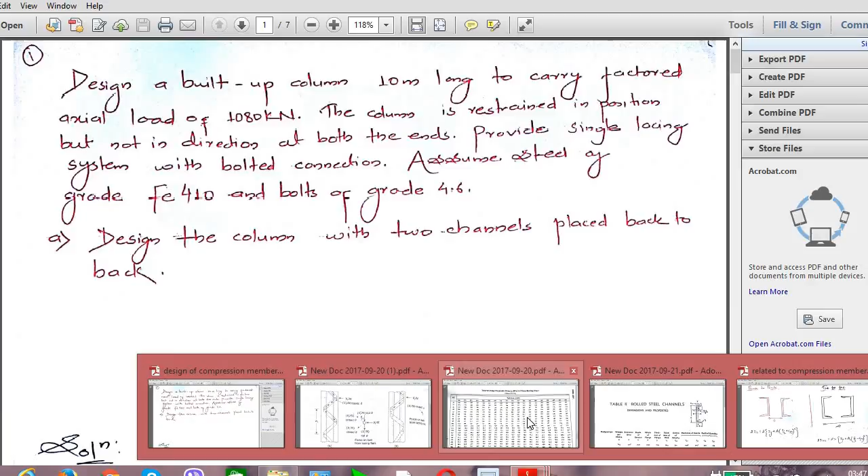So see, you will get some value for this. Okay, so your question was restrained in position but not in the direction. So according to conditions the value will vary. So the translation is completely restrained at both of the ends while rotation is free at both of the ends, right? Because not in the direction.

So our condition is the translation is restrained by position at both of the ends, and the rotation is free at both of the ends. So the value is 1 times length. So your effective length is 1 times L.

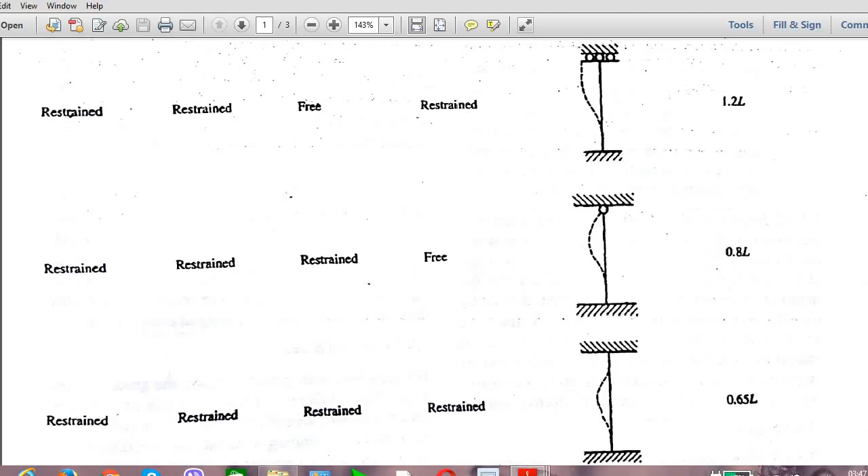So similarly you can go for different values according to different conditions. The conditions will be given to you in the question, so according to those different conditions you can take different values. You can get this from table 11 of your code book, IS 800 2007.

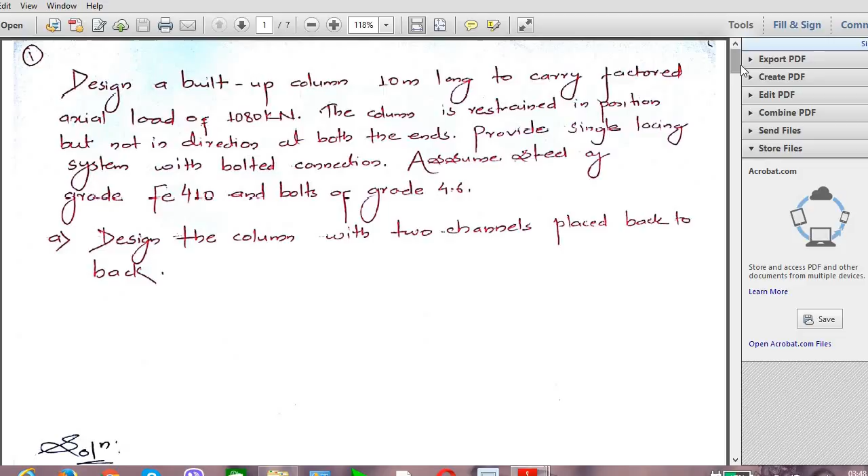So now provide a lacing system with the bolted connection. Assume steel of grade Fe410 and a bolt of grade 4.6. So the grade of steel is given as 410 and the grade of bolt is 4.6, and it is asked to design the column with the two channels placed back to back.

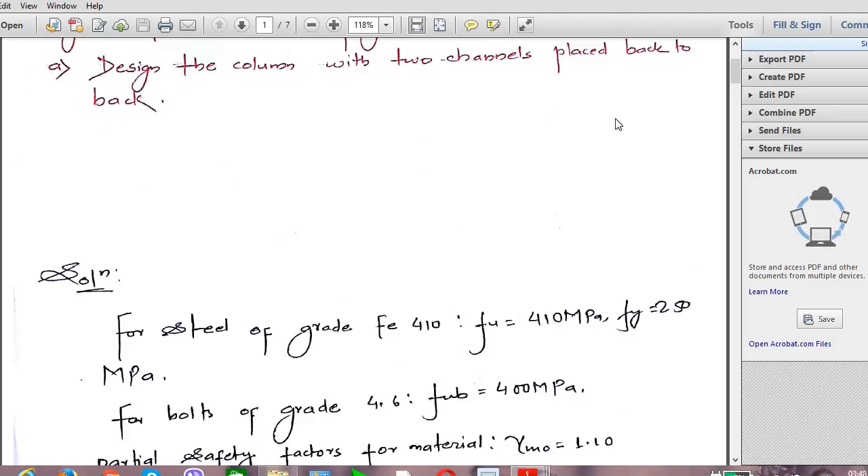So sometimes they might ask you toe to toe. Actually I am going to design the column with two channels placed back to back. In my next video I will explain toe to toe. Okay, so for a moment I'll show you what's the difference between back to back and toe to toe.

See, back to back means the flanges of the channel are facing opposite to each other, they are not facing each other. In toe to toe, the flanges of the channel are facing towards each other. So this is known as back to back and this is known as toe to toe.

So according to the conditions the formula varies here to find the value of S, it will vary. I'll explain that in the numerical.

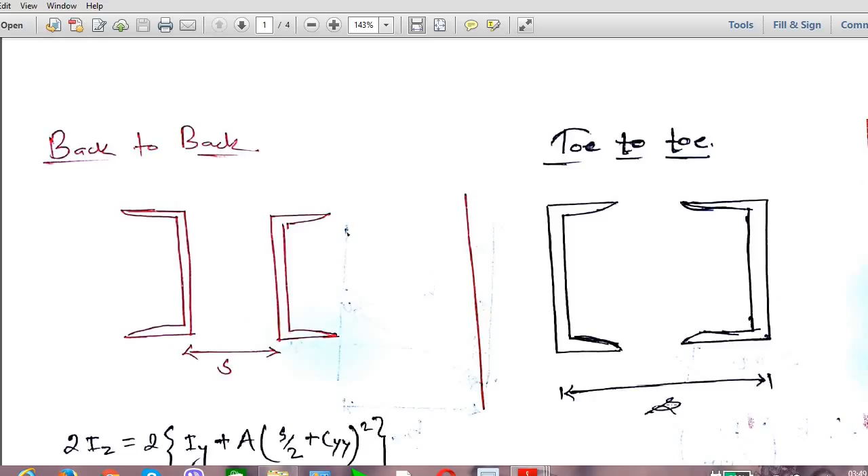So this is the difference: the distance between one edge of the channel to the other edge is S. Here also, the same condition, the distance between one edge of the channel to the other edge of the channel is also denoted by S only, that is spacing. You will be more clear in the numerical.

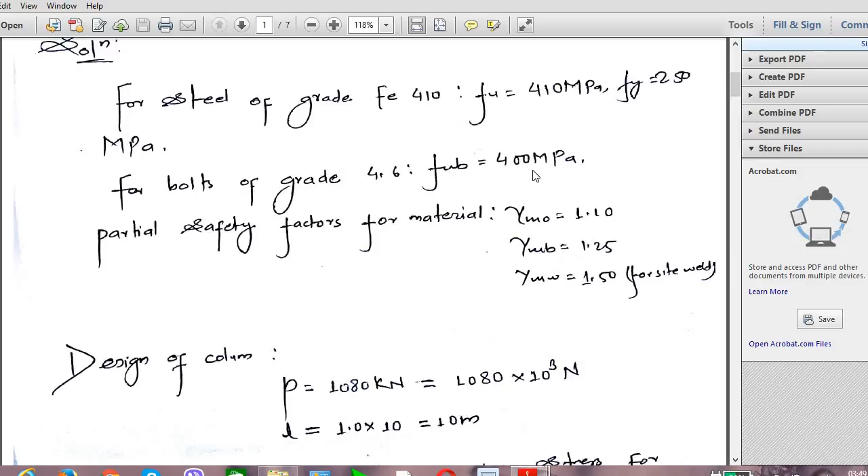So solution: the grade of steel is given as Fe410, so Fu will be 410 megapascal, yield stress Fy will be 250 megapascal. Similarly the grade of bolt is given as 4.6, so obviously Fub will be 400 megapascal because 4 times 100 is 400. Suppose the grade of bolt is 8.8, then it will be 8 times 100, 800.

Okay, similarly it will go in that way. Partial safety factor for material: gamma m0 is 1.10, gamma mb is 1.25, gamma mw is 1.50. All these values you will get from the code book.

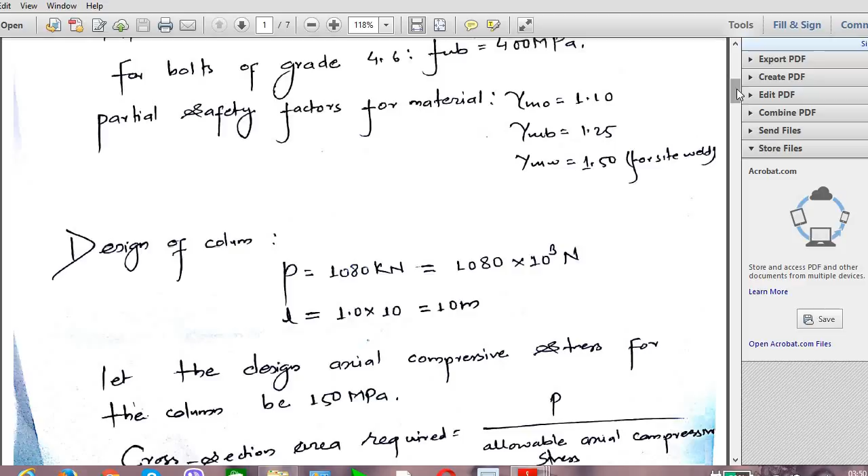Fine, so now we have to design the column. Load is given as 1080 kilonewton, that is 1080 times 10 to the power 3, I am converting into Newton, and length is obviously 1 times L, so 1 times L will be 10 meter. The design axial compressive stress I took here is 150 megapascal.

Actually you are allowed to take a value between 125 to 175 megapascal. So from this range 125 to 175 you are allowed to take any value. Actually I took 150, so you can also better adapt to 150, it won't cause you any problem.

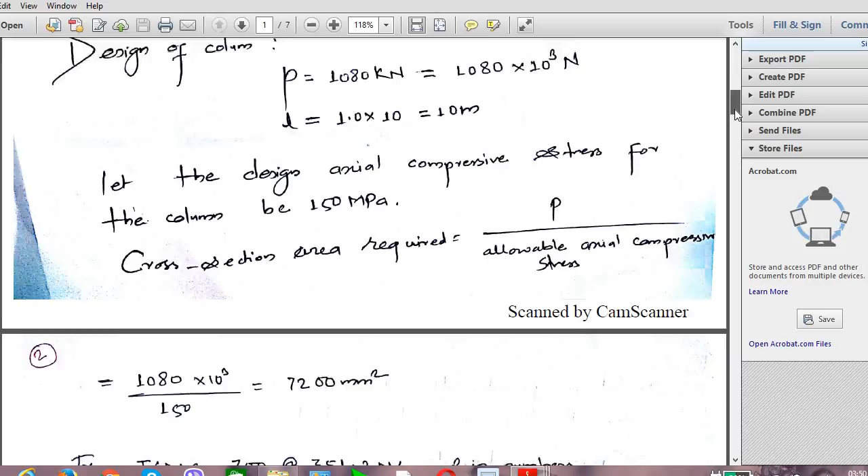Cross section area required is equal to P by allowable axial compressive stress. So what is P? 1080 into 10 power 3. Similarly, 150 megapascal is our axial compressive stress. So total area I got is 7200.

This 7200 mm square is the total area for two channels, not for one channel. It is for two channels. So if you go for one channel, it will be 3600.

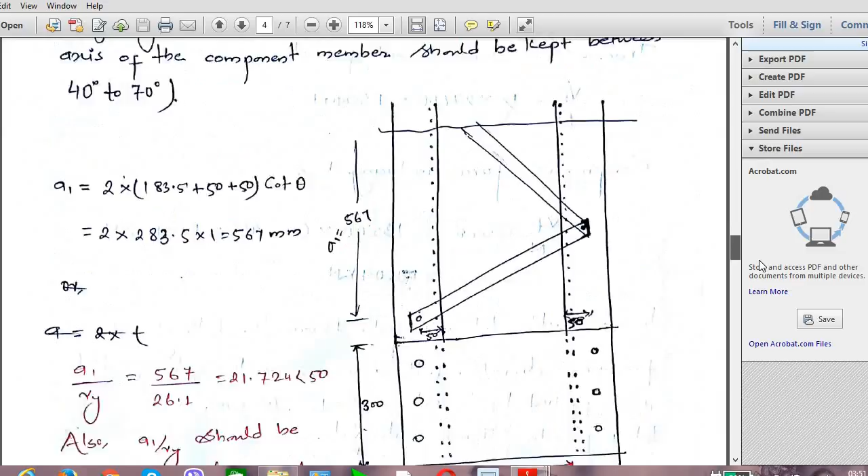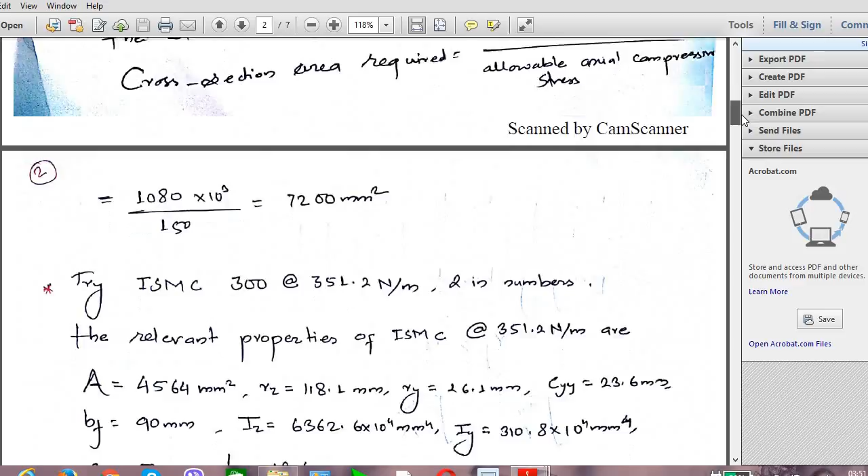So I have to select ISMC, that is, I have to select a channel in such a way that its area is more than 3600 mm square. So I went for ISMC 300.

See, the area is 4564. It is more than 3600 square. Actually, you can add up 250 as well, but I did that.

I added up. Initially I took 250 whose area is more than 3600. You can see here, ISMC 250, whose area is more than 3600, right?

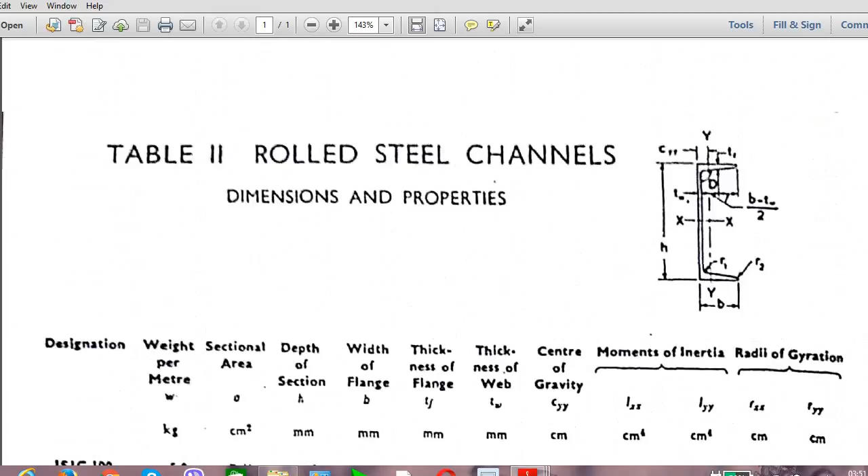3867 mm square. Actually it is in centimeter square, cm square. See here, it is in cm square. I took mm square. So 3867 square, but it is not satisfying the conditions.

See, we have to get a value, we have to get a design compressive strength PD more than 1080 kilonewton. So when I took ISMC 250, then I got a value which is less than 1080 kilonewton. So obviously if I get less than 1080 kilonewton, it won't be a value of more than 1080 kilonewton, right?

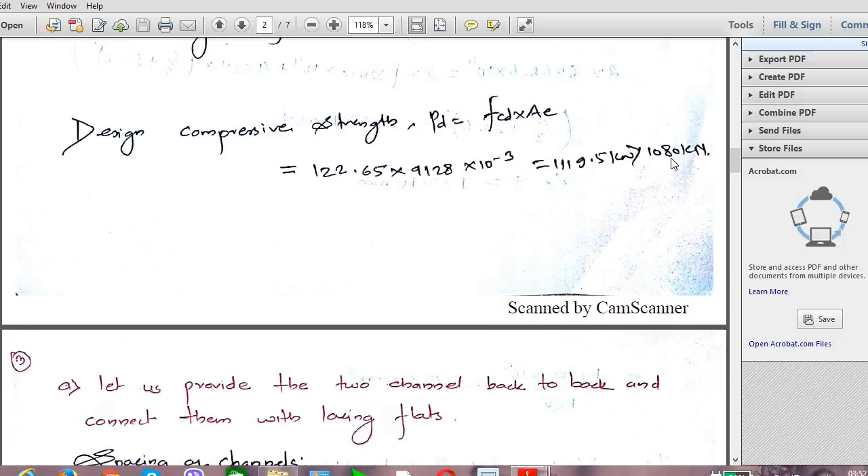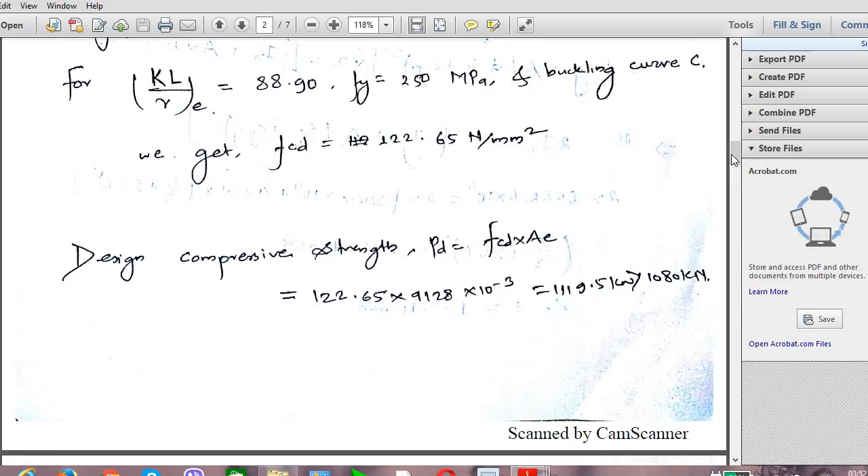That's why I took again ISMC 300 at the rate 351.2 newton per meter, 2 in numbers. So you can try 250 once and check the value, similarly you can check what you will get. But you will get a better value in ISMC 300 only. So don't go for more than this, because this is satisfying our conditions.

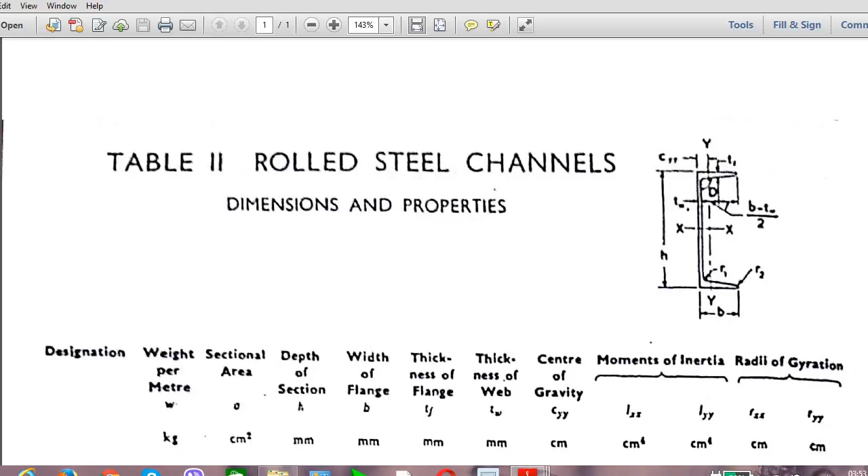So the relevant properties of ISMC at the rate 351.2 newton per meter, all this property you can get from the codebook. Please go to the table. I am showing here details, so please look at this table. I am showing here the tables and your codebook pages, not pages but where it is available in the codebook, so it will be more easy for you guys.

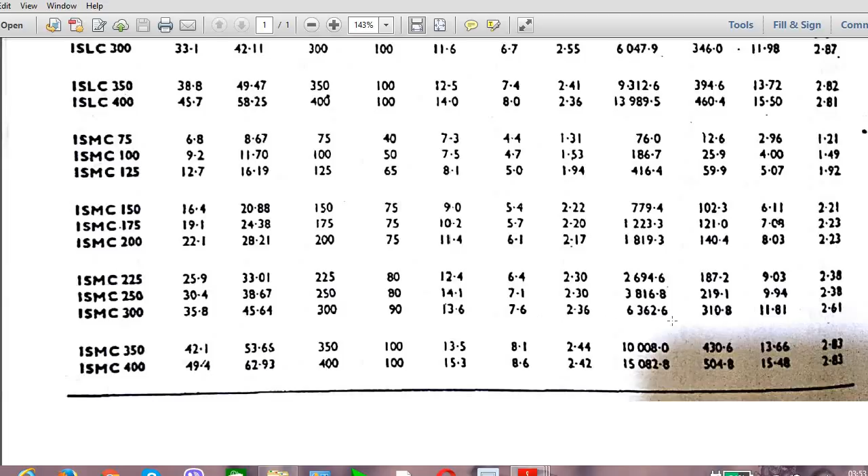See, ISMC 300, all the values you can get from here. You will get every value from this line, and the notation is at the top. So with help of this notation, you can get all required values, all important values. So let's go to our question, you can get all this value.

Now total area, because you have two numbers of channels, right? So 2 into 4564, that is 9128 mm square. So minimum radius of gyration RZ is equal to 118.1 mm.

Actually there is one condition for us. Before designing the channels, there is one very important condition: the sections are so spaced that the radius of gyration of the section about the axis perpendicular to the plane of lacing is not less than the radius of gyration about the axis in the plane of lacing.

This is achieved by making radius of gyration about the YY axis equal to or greater than radius of gyration about the ZZ axis. We know that from slenderness ratio L by least radius of gyration. So in this case, if I took RZ here, then obviously RY will be either equal to or greater than RZ. That's why always try to take RZ here.

So 10 into 10 power cube by 118.1, we get this value, 84.6740.

Please don't be more confused, because I am saying here minimum radius of gyration. If you compare here RY and RZ, you are getting RZ is more. Actually the condition says RY must be greater or equal to RZ.

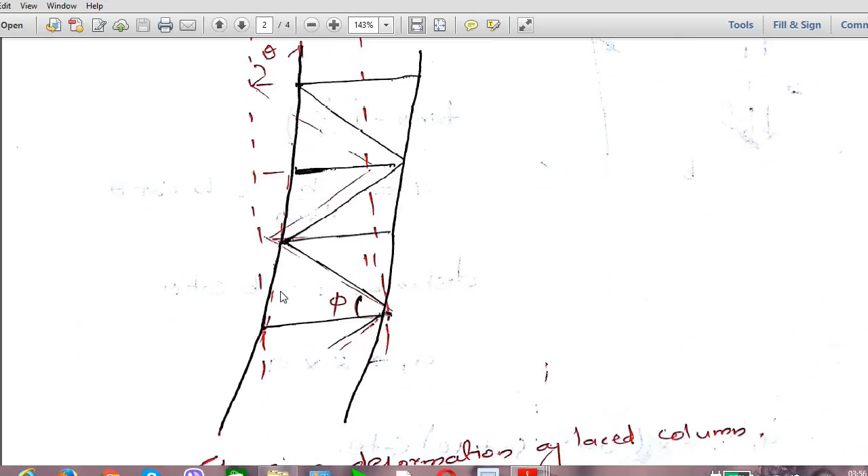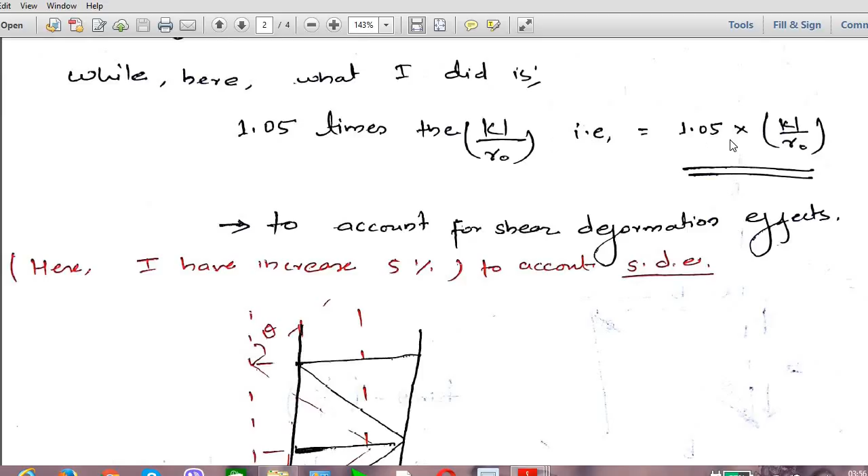To account for shear deformation, I have to increase by 5%. Let me show you a diagram so it's more clear. See this column, there is a chance of shear deformation, so to account for that condition, we have to increase by 5%. Try to increase 5%, whatever value of K you get, and 5% for KL by R naught. Always try to increase by 5%.

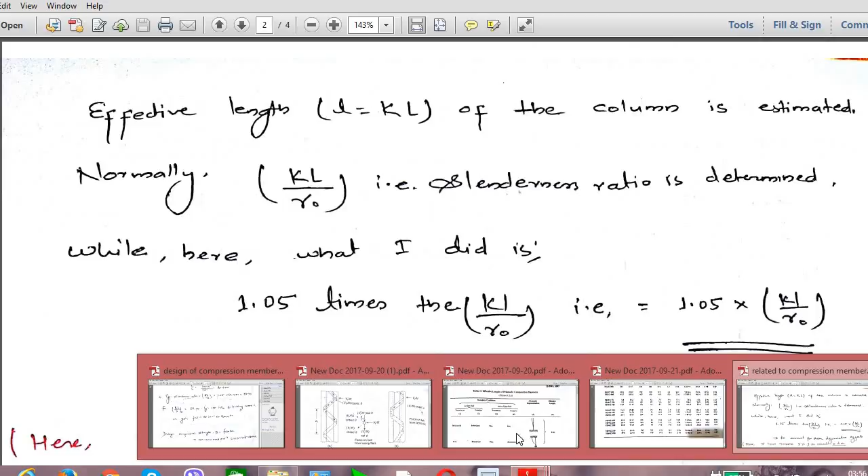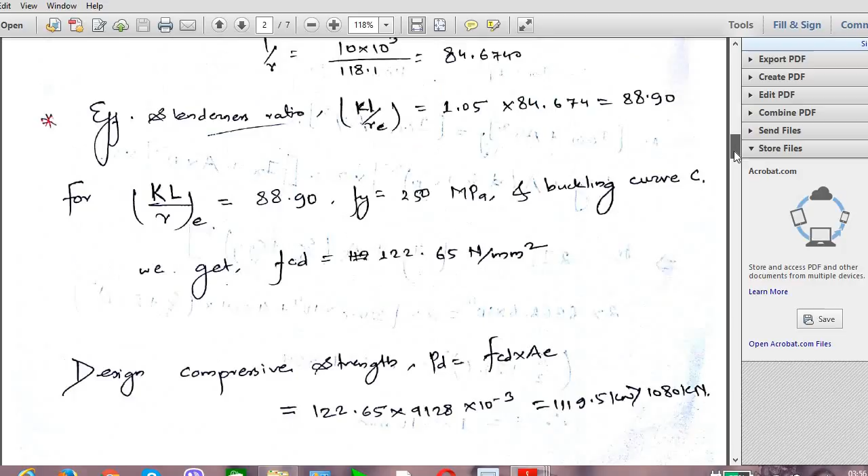Our effective slenderness ratio is 88.90, Fy is 250 megapascal, and buckling curve is C. How do you know this is buckling curve C? You can know this from the table. We know the buckling curve C from the cross section.

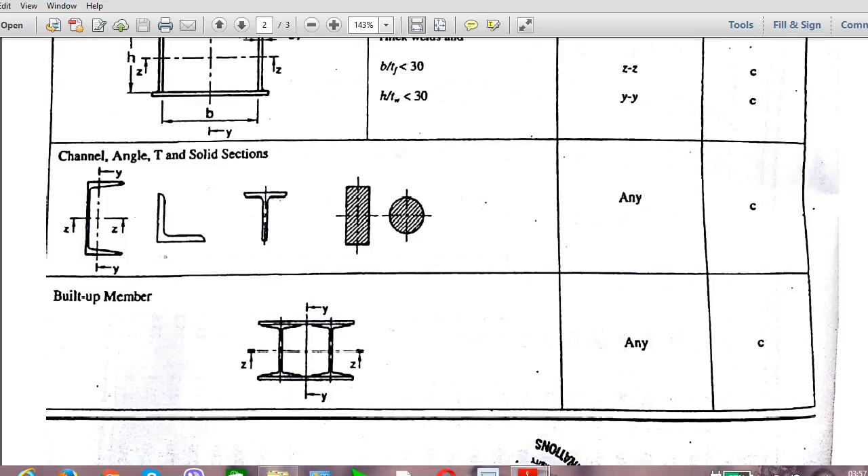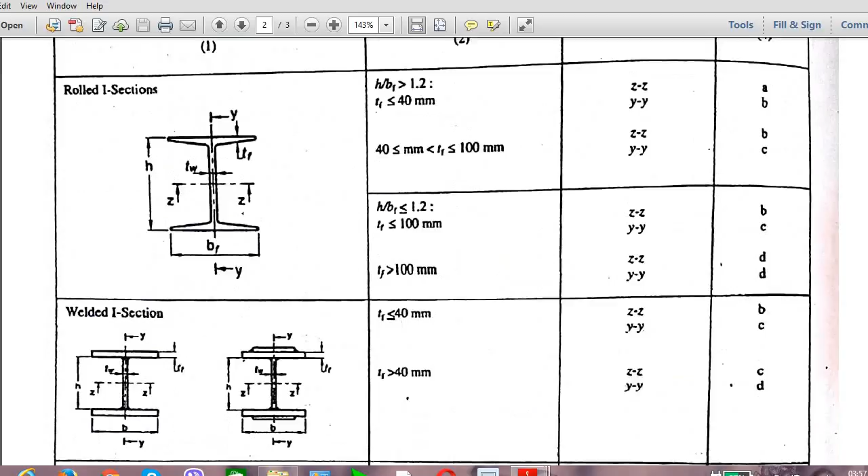See our cross section, these are the cross sections. Please go to Table 10, buckling class of cross section, clause 7.1.2.2, under which there is Table 10. So there is a buckling class C, and you have to see the cross section, which cross section it belongs to. So buckling class is C.

According to the table, if you have an I section, then it may be A, B, or B, C. Again you have to check certain conditions, and according to those conditions you choose which class it is. But in our case, it's a simple C channel type, so you can take C.

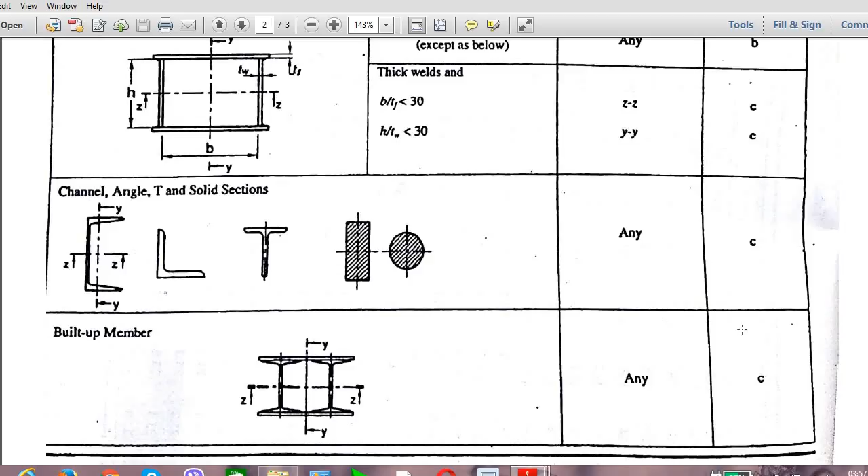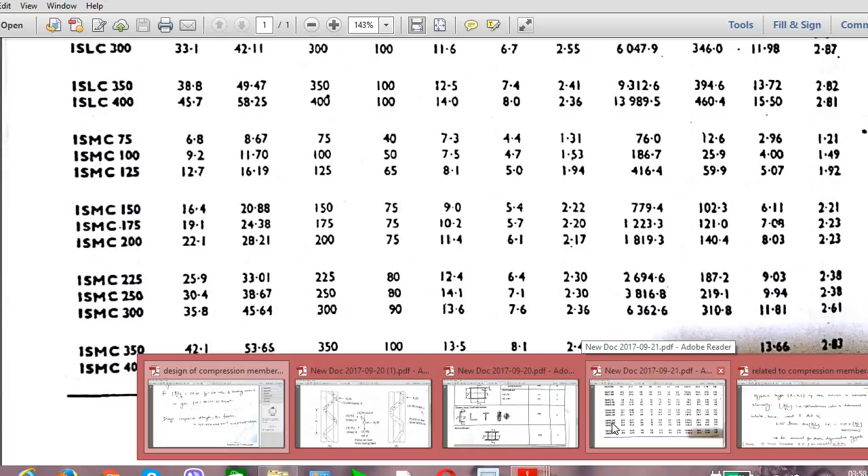So we got KL by r, we got Fy, and we know the buckling class is C, buckling curve C or class C. So FCD is 122.65 Newton per mm square. You got this value by interpolating. Interpolation is required here. You have to go to the table in the code book. In the code book there is a table for design compressive stress FCD for column buckling class C.

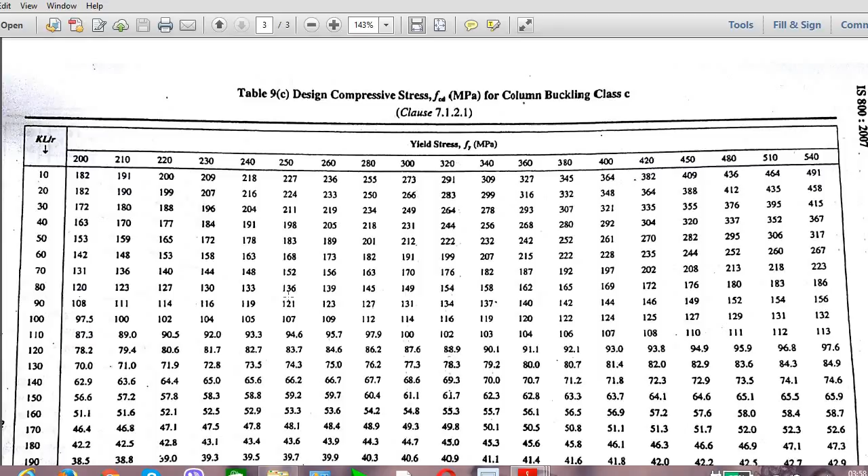See, KL by R, you got this value, 88.90, between 80 and 90. Similarly, see here under 250, the values are 136 and 121. So you must get a value between these two: 136, suppose value X, and 121. We have to find X by interpolation. I did the same thing and got the value FCD equal to 122.65.

That's why I am showing you the code book pages, so it will be easier for you guys to find out where the value is available.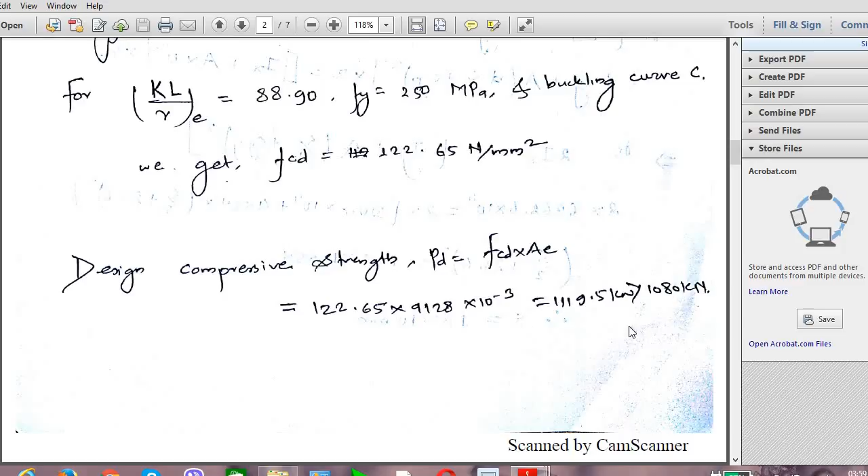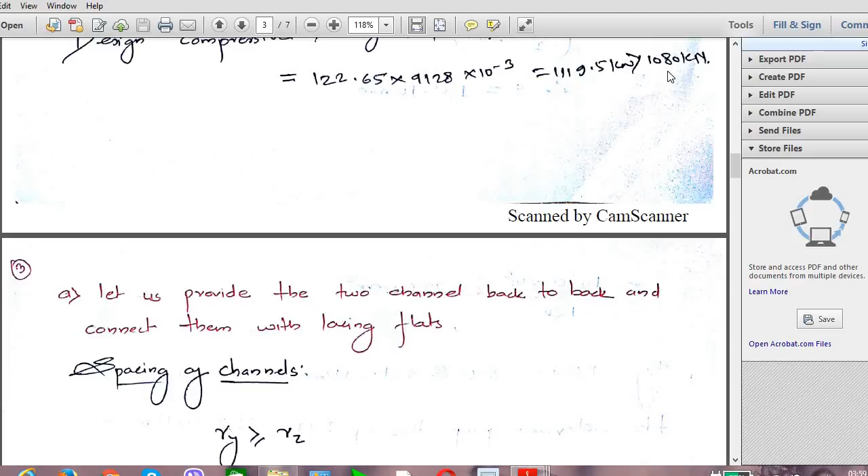So the design compressive strength PD is equal to FCD times AE. FCD we know is 122.65, into the total area. You know this is the total area because I already told you it is for two channels, so obviously 2 times 4564 equals 9128 mm square. So this is the value. We got more than 1080 kilonewton. So obviously if I get more than 1080 kilonewton, then it will bear the load up to 1080 kilonewton. So no doubt about that.

Now our first part is completed. For the next part, we have already defined the channels, so the spacing of channels is really important. To find the spacing of channels, let us provide two channels back to back and connect them with lacing flats. So what is our condition for spacing of channels? Ry must be greater than or equal to Rz, so obviously we get this relation.

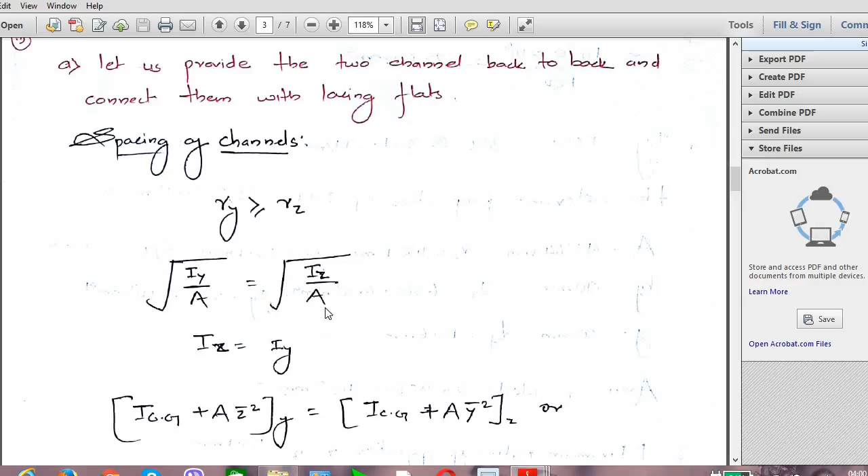You know that Ry is under root Iy by A, and Rz is under root Iz by A. In this case, don't be confused, Iz and Ix, or Rx and Rz, are the same thing. So don't be confused. You know this formula for unsymmetric section, which you have already read in strength of materials and other subjects.

So ICG plus A times Z bar square, or ICG plus A times Y bar square. In this case, IY plus A times spacing by 2, plus CXX square — in this case we don't have CXX, so it is zero. This value, ix times 2, I wrote on this side. See here, this value I wrote at this side, and this value I wrote at this side. Don't be confused, it's like crossing over to each other — this value I wrote at this side and this value I wrote at this side.

So 2 times this value, all value is available in the code book. Now there is confusion about s by 2 plus cyy. So see, one scene diagram, don't be confused.

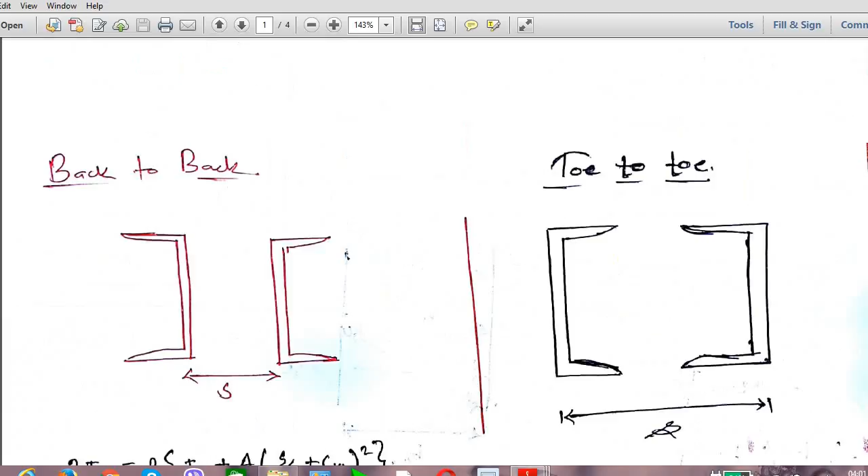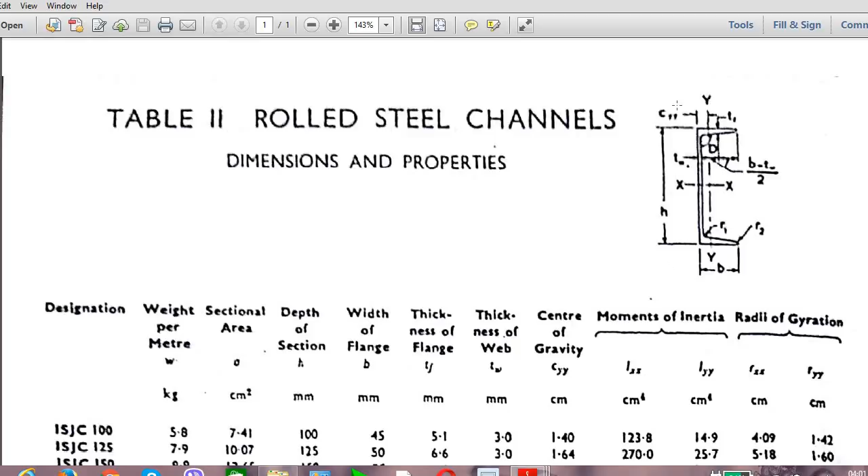Scene diagram - see, this is cyy, right? Up to this distance it is cyy, and we have to take a center distance from both of the channels. So for both of the channels, this is cyy, we have another channel this side. There is cyy, and the middle is s by 2. So here we have a clear diagram for that.

You can see here, suppose this is cyy and we have a middle point s by 2. So the centroidal distance between two channels we have to find. For that condition I did...

s by 2 plus cyy. Total area times the centroidal distance, so area times s by 2 plus cyy will be the centroidal distance for two channels. So the spacing I'll get, s is equal to this much, 183.10 mm, by solving this, because all this value is written at the top. You will get all the value from here.

And if you are getting more confused, then directly it is like a formula type - you can just remember this as the formula type. Try not to mug it up, try to understand how it came. It is like a formula type - if you feel it's a little tough, don't forget, you can directly replace the value and get the value of s.

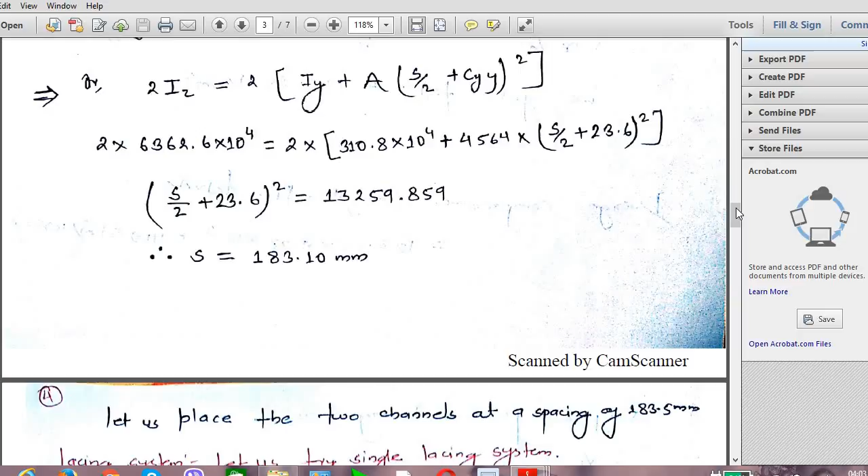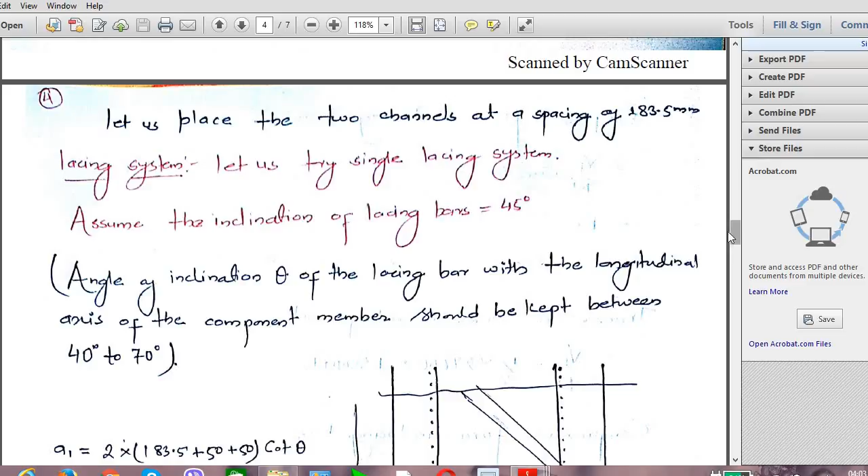So better try to understand the conditions before mugging up. Try to know how it came, and then it will be more easy for you guys. You can directly connect and get the idea from this figure and then the next figure. So this is s by 2. Actually I have not shown a clear diagram here. Now we know the spacing s is 183.5 mm.

So for the lacing system, let us try a single lacing system. Assume the inclination bar is 45 degrees. I took here the angle theta, this inclination to the longitudinal axis - you are allowed to take between 40 degrees to 70 degrees. So I took 45 degrees here - better to use 45 degrees, it will be more easy for you guys.

So now you see here, A1 - before saying this, let's say this, then I'll say another. Let me explain this: 2 times 183.5. So spacing is 183.5, we got it from the above expression.

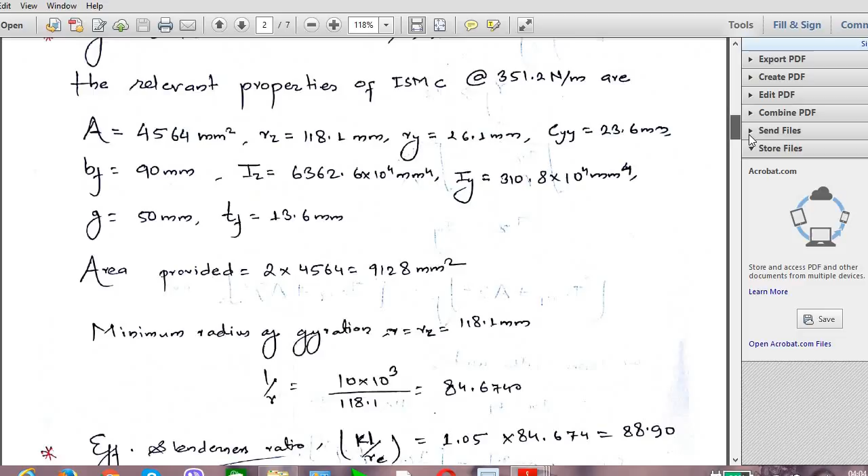And the 50 distance g is available in the given data - see, g is 50 mm, g plus 50. So your centroidal distance between two channels is - this is the total centroidal distance between two channels.

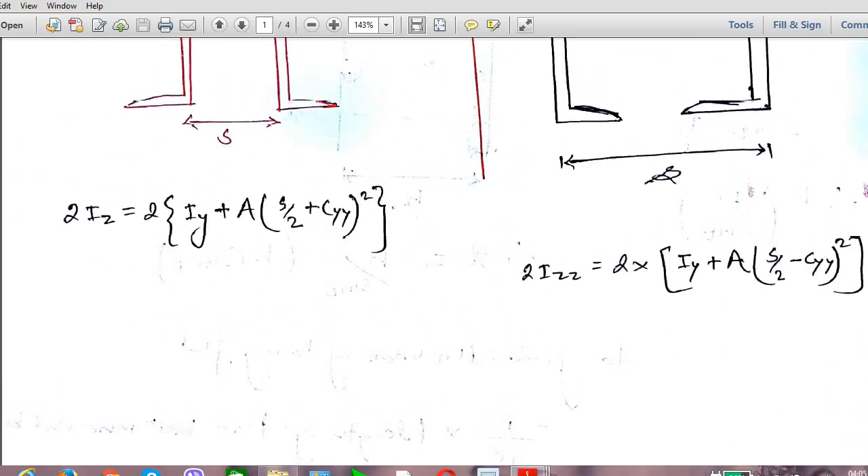Now what I did: cot theta, so I multiplied by 2. So I'm explaining you here - you got the value 183 plus 50, 50. So total you got the value 283.5, right? So suppose this is horizontal value 283.5.

To get a vertical value, so that horizontal value is b, right? So suppose this is b, and to get vertical value a, we know that tan theta is equal to b by a, so a is b by tan theta, b is cot theta, a is equal to b cot theta.

So distance a is b cot theta - horizontal distance times cot theta. Yes, vertical distance is horizontal distance times cot theta, and I need the value A1, that is the lashing flat from this end to the lashing flat of another end - up to this end.

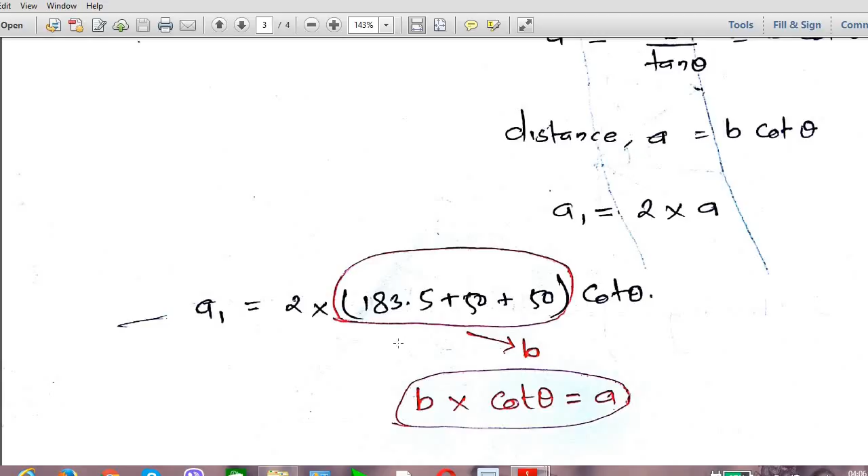So total I need this value. A for this channel, for this lashing we have one value A, for another lashing we have value A. So we need total A1, that is 2 times of A. So it is very clear, A1 is equal to 2 times of A. In our case, 183.5 plus 50 plus 50 is horizontal distance, into cot theta I got a vertical distance A, into 2 I got total distance.

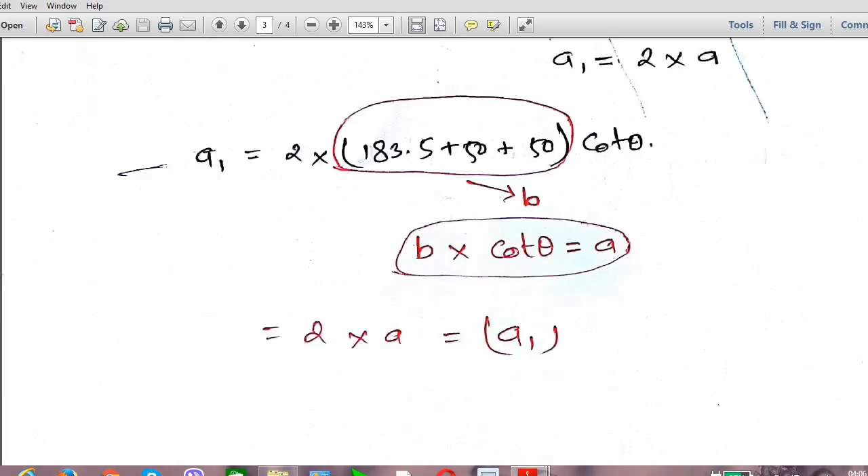Yes, so 2 times A is A1 - same thing is happening here. See, 183 plus 50 plus 50 plus 183 plus 50 times cot theta, I'll get this value, times 2 I'll get up to this end. So 567 mm.

So there is one condition: A1 by Ry must be less than 50, or must be less than 0.7 times 88.90. 88.90 I think it is KL by R, right? It is at the top - see here, KL by R, 88.90.

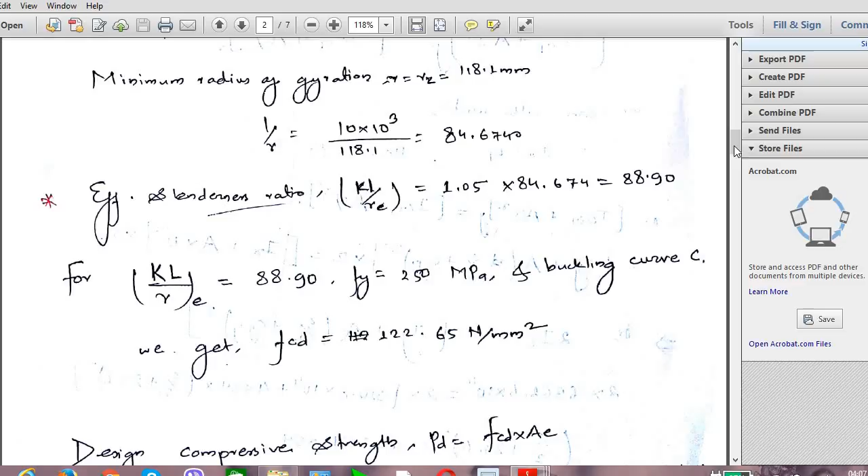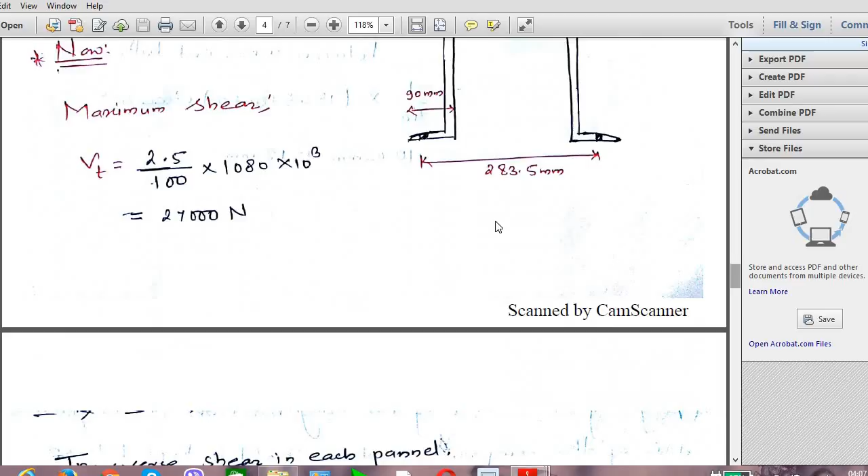So you will get that value. Now we got all this, all conditions are satisfied up to here. So now maximum shear, transverse shear in each panel, and compressive force in each lashing bar. Before explaining this, I am going to show you a diagram that is more easy.

So in simple manner, just understand Vt by N will act like transverse, Bt by N cot theta is vertical, and Bt by N cosec theta is inclination. Okay, simple, it is very simple. So I'll explain you, see here.

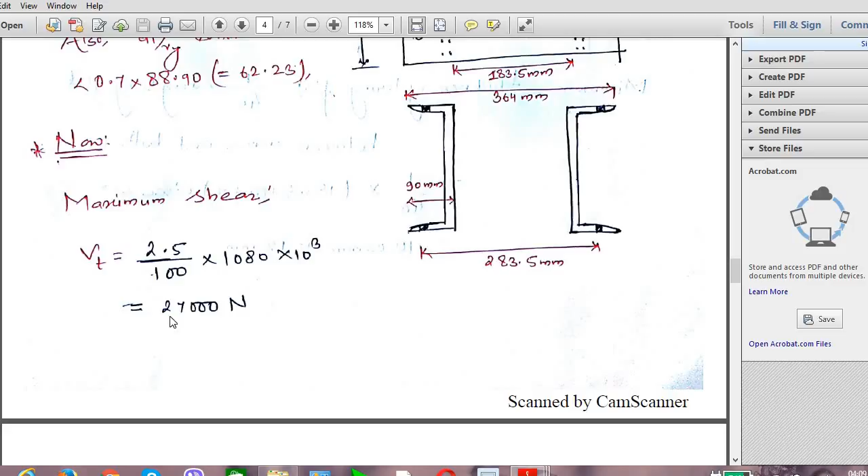Now let's go in our question. Maximum shear is Vt, it is 2.5% of total load. Always maximum shear force is 2.5% of total load. So 2.5% means 2.5 by 100 into total load. We will get 27,000 Newton. This is the maximum shear force.

Now, what is the transverse shear in each panel? Transverse shear, we know that transverse shear is Vt by N, right? So transverse shear is Bt by N. So 27,000 by 2. Okay, I write here 27,000 by 2.

So N is equal to 2 for 2 channels lashed on both faces. Okay, that's why it is a 2. I'm again saying you the N is equal to 2 for 2 channels lashed on both the faces, right? That's why it is a 2.

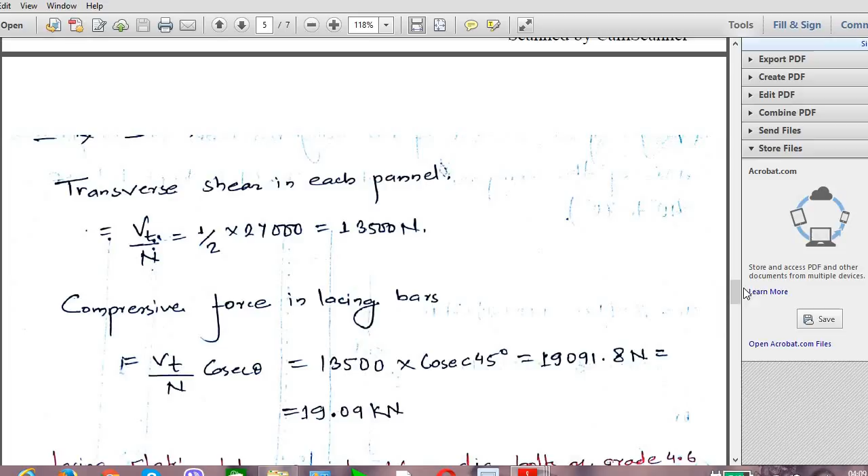Now see, compressive force in lacing bar. So compressive force is like Vt by N cosec theta. Obviously you will go for, if you make a theta this, and this is your Vt by N. If you are going to find this, then it will be like this distance. Suppose this is the Vt by N distance, for example, assume it, and this is the h, you have to find hypotenuse, right? So if you are going to find this, then obviously it will be Vt by N sin theta. So if I'll convert, if 1 by sin theta is equal to cosec theta, same thing, right?

So you will get this compressive force Vt by N cosec theta. It's all about geometry, nothing more complex. See, you can know more from here. See, if it is theta, then what is our sin theta? B by this distance, right? So to find this distance, obviously B by sin theta. So you will get that B cosec theta.

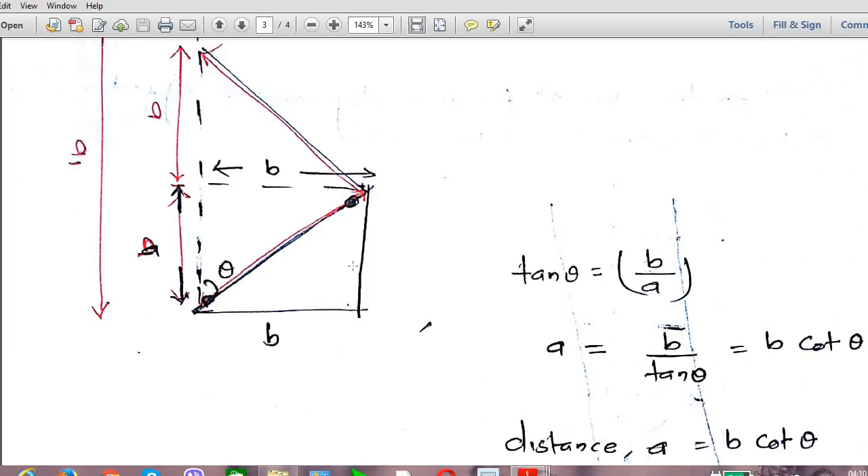Similarly, you got here Vt by n cosec theta. So obviously try to understand a simple way. This force is always Vt by n cosec theta. That is compressive force between one inner bolt and the other bolt. So now obviously it is Vt by n cosec theta. So you'll get this value. Fine. Now

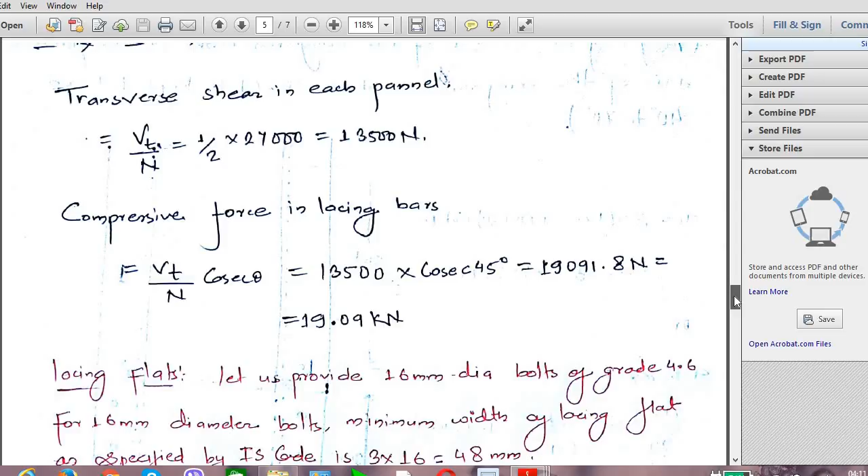We are going to assume a diameter of bolt. We are assuming a 16 mm diameter bolt of grade 4.6. So obviously now we have to find the minimum thickness of lacing flat.

So thickness means, see here I will show you diagram. Diagram is this, okay, thickness, it has got a certain thickness. It is a width and it will have a thickness. So the thickness of lacing flat, we have got one codal provision, codal formula. Let's say minimum thickness of lacing flat is 1 by 40 length of the flat between inner bolt.

Okay, so the length between this bolt to this bolt - obviously you can calculate that because you know the horizontal distance. If you know the horizontal distance, 183.5 plus 50 plus 50 cosec 45 degree, that gives you this distance from this bolt to this bolt. So horizontal distance times cosec 45 degree, you will get this distance, right?

All these things are about geometry. Just try to understand the geometry.

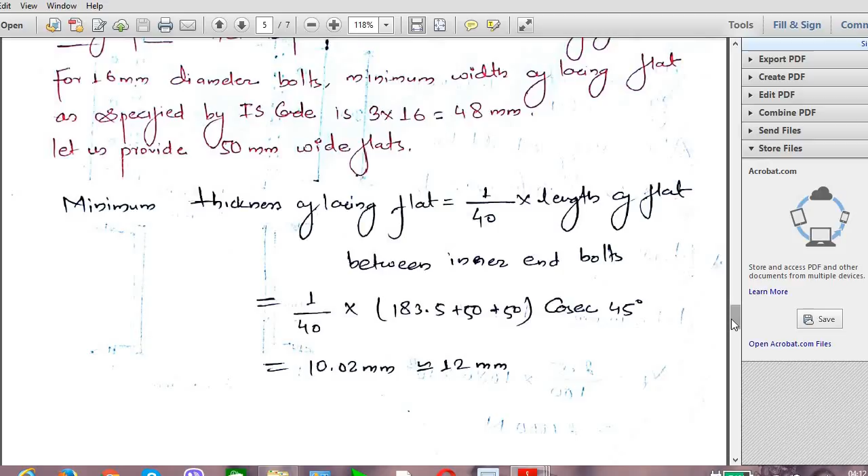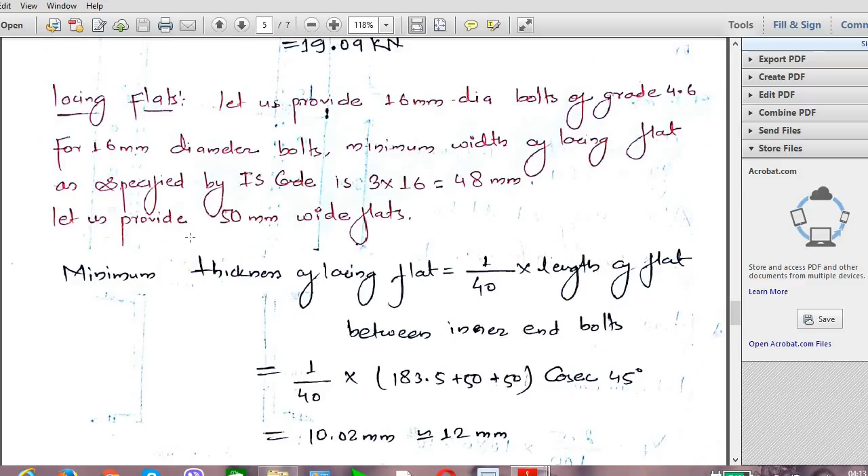Now to calculate minimum width of the lacing flat as specified by IS code, it is 3 times the diameter, that is 48 mm, or it must be not less than 50 mm. So either 16 dia into 3 times diameter, or not less than 50 - so I took 50 mm. I took width of the flat as 50 mm. So the width of the flat is 50 mm, and the thickness of the flat is 1 by 40 length of the flat between inner bolts.

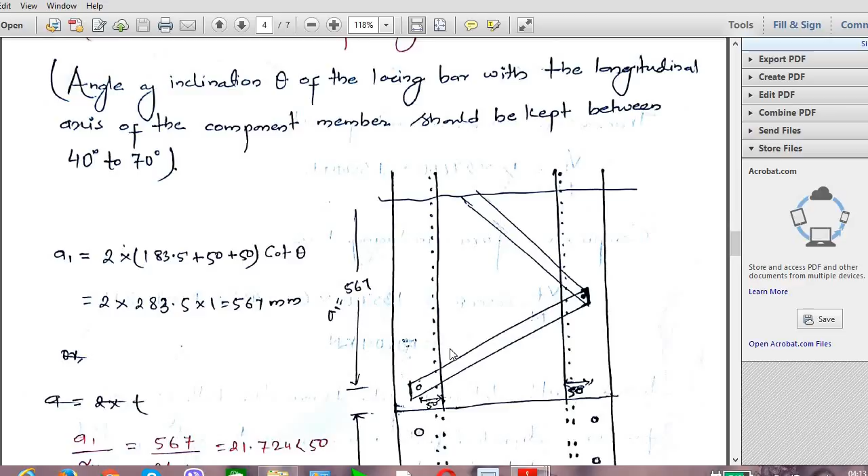So 1 by 40 inner end bolt - you know this formula because I already explained the 50, 183 and 50. Just find out this as the hypotenuse distance. You know the theta, so you can get that distance. So I got 10.02 mm, which is approximately equal to 12 mm. Fine.

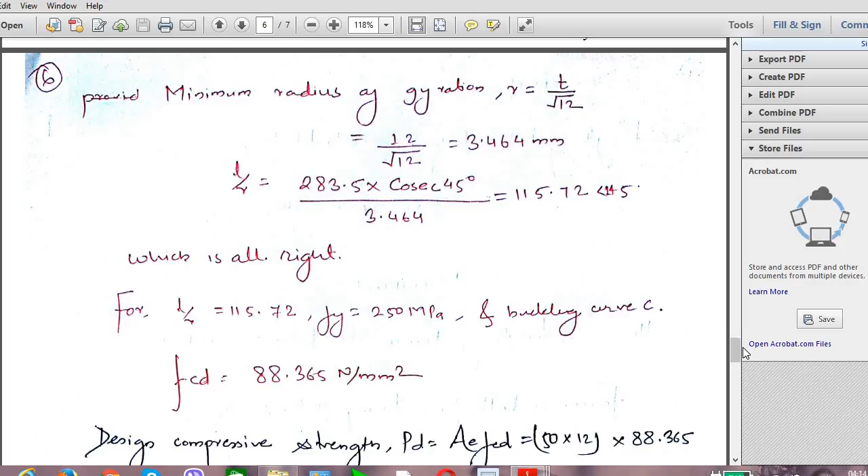Now there is one condition: minimum radius of gyration is t by root 12. So that is 12 by root 12. Actually this distance you can get very easily - I wrote it here directly, so you can write t by root 12. No problem for that. Okay, so you know the value of thickness, 12 I took, so just 12 under root 12. Actually in class I think I have told about this - L by R.

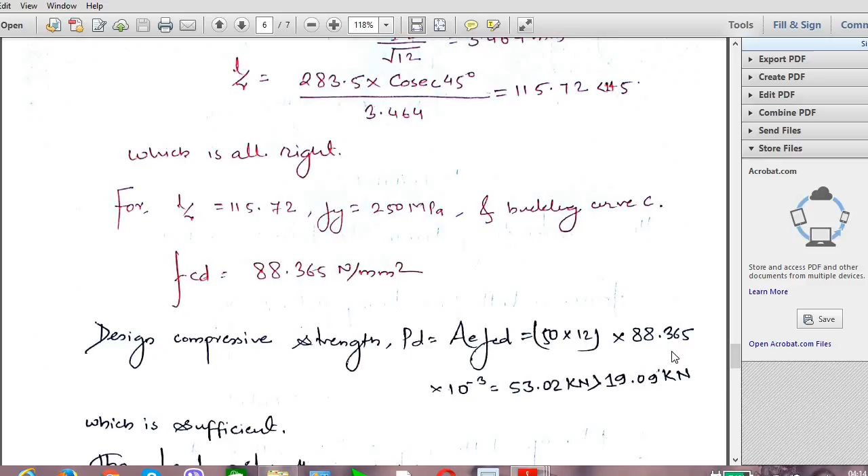So we know the total length, and we know the R what we got here. So okay, we got the value which must be less than 145, which is all right.

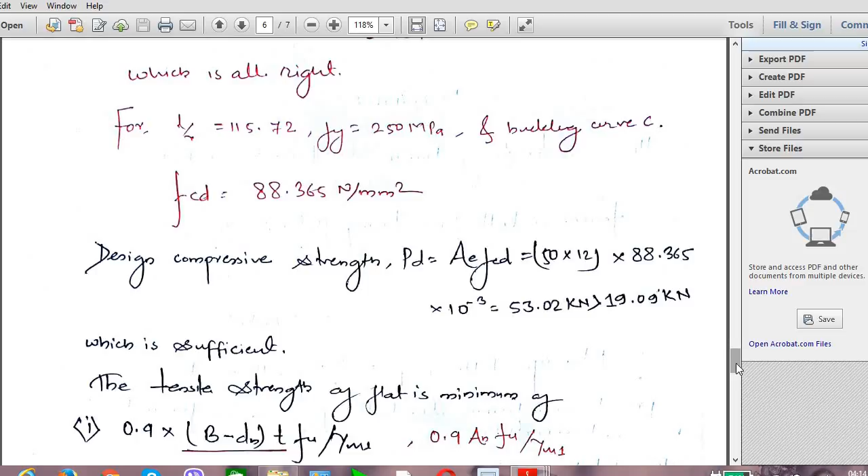Now buckling class: L by R is 115.72, Fy is 250 megapascal, and buckling class curve C. So again same thing, we know the value of L by R, Fy, and buckling class C. We can go to the code, table 9c, and you can interpolate this value and get FCD.

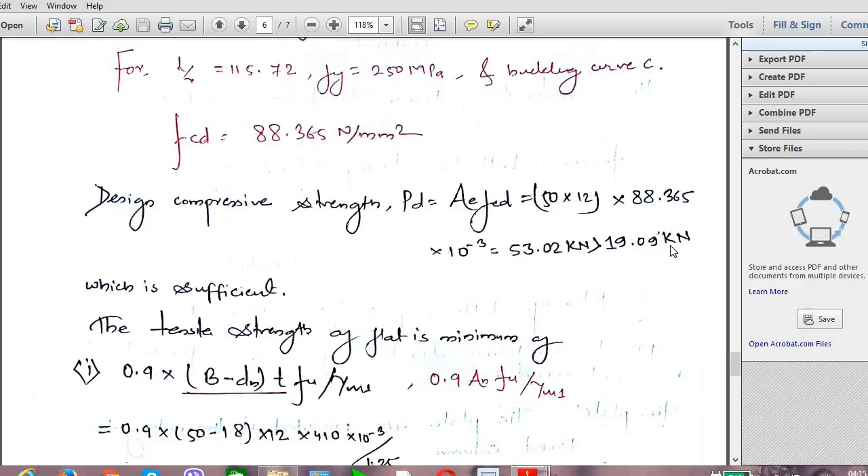See, you can get the value FCD. So we know the thickness of the flat, width of the flat into FCD, the load you get is 53.02 kN, which is greater than 19.09 kN. It is all right, which is sufficient.

Now we have to find out the tensile strength of the plate, that is the flat plate, the lacing bar. So you know that 0.9 into net area by Fu by gamma m1. So what is our net area? Total width minus diameter of the hole - there's a hole of 16 plus 2, so 18, into thickness which is 12. So you can get the net area.

You know how to find this better. Gross area you can find because you know the width 50 and thickness 12. So gross area you can get.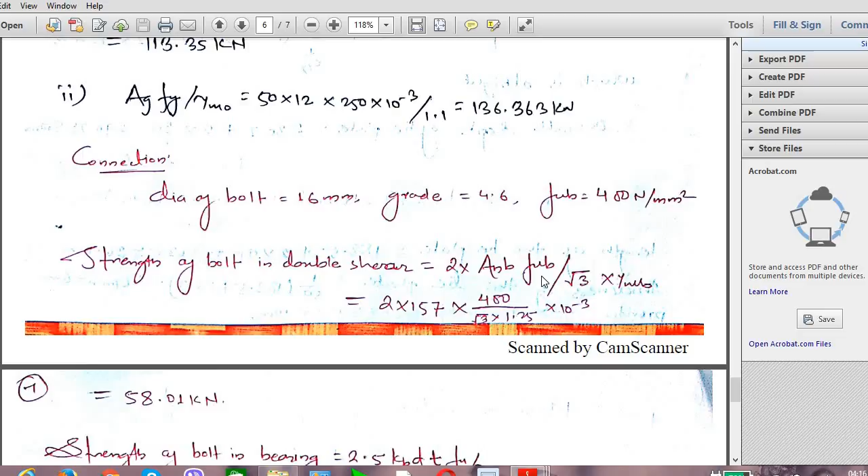Nn is equal to 2 - you know Anb, 0.78 times the area, and then FUB, you know the value, root 3, you know the value, gamma MB, you know the value.

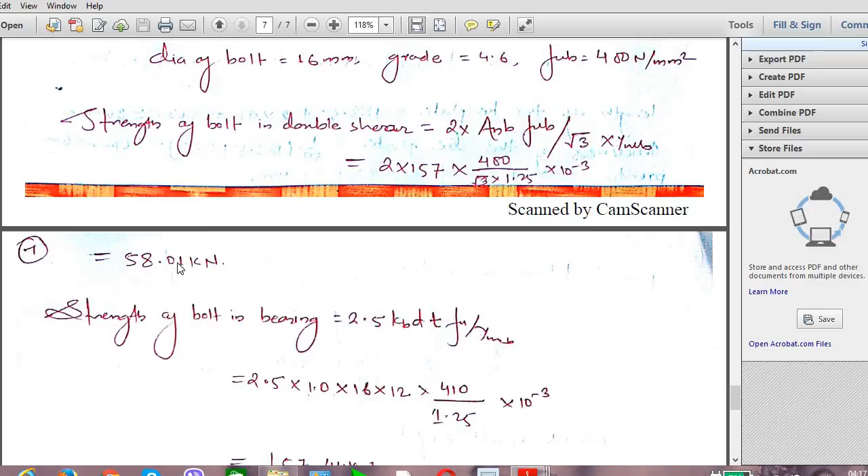So just place the value. Similarly, you can go for bearing. You know all this value because I have already explained this in first and second classes, so you know those values. So you can get directly, and then you have to find out the minimum value. Obviously 58.01 kilonewton is the minimum value, so you better choose minimum value. So minimum value is 58.01 kilonewton. Now, force on a bolt from lacing plate.

What is the force on bolt from lacing plate? Force on bolt, as I already told you, is 2 times Vt by n cot theta. See here how the lacing plate makes force. From this 2 Vt by n cot theta, the Vt by n cot theta is your vertical load, right? You know the value, this is theta, this is theta, you know this Vt by n. So if you convert it into vertical load, it's all geometry. Due to the two lacing bars, you get 2 times Vt by n cot theta. So total force is 27.0 kilonewton.

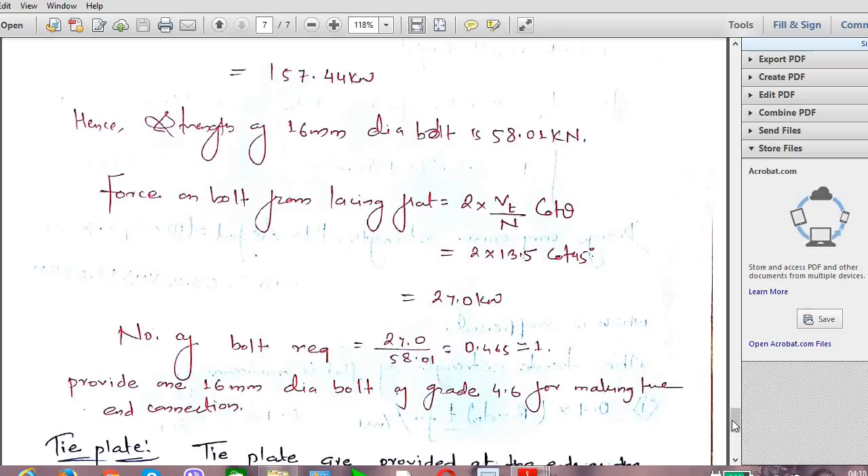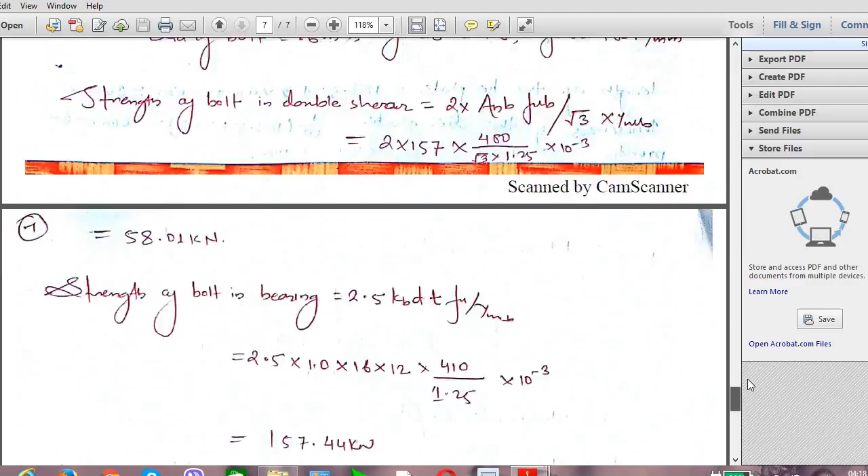So number of bolts required, as I already told you, is total force by strength of a bolt, either in shearing or bearing, whichever is minimum. So 58 is minimum, so 0.465, which is equal to 1. So better give 1 bolt. That's why you can see in the diagram, I have provided just 1 bolt. See, 1 bolt here and 1 bolt here. Just 1 bolt. So I give 1 bolt.

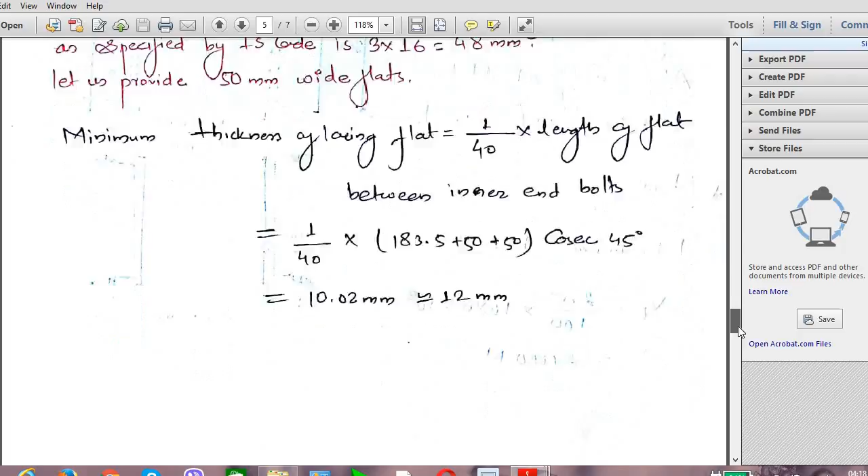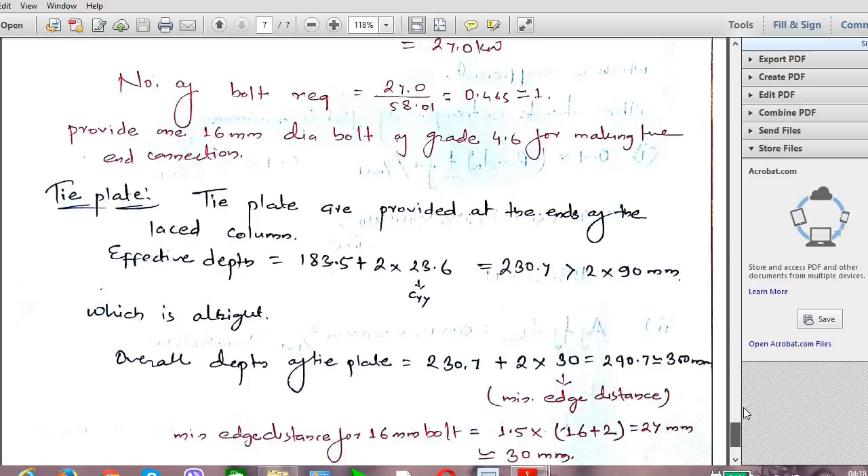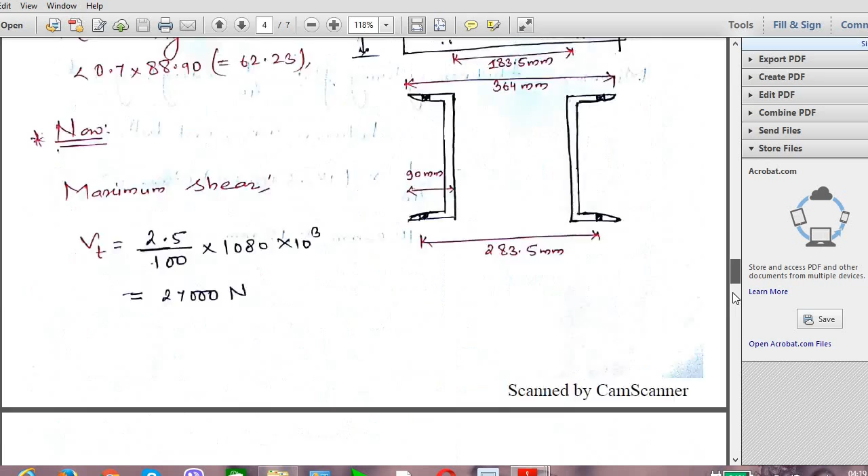See, 1 bolt. Now tie plates. This is your tie plate. See here in the figure, this is the tie plate connecting the end plate, which is connecting both of the channels. See, this is the tie plate. So in this case, you better find the horizontal distance, right? Width of the channel, so you know that.

183.5 plus this distance is your horizontal distance, right? So this is the horizontal distance. See, 183, effective depth, there is a formula, spacing plus 2 times of cy. So this must be not less than 2 times 90 mm, which is alright. Overall depth of the plate is 230.7 plus 2 times 30.

So overall depth of the plate is 230.7 plus 2 times of 30, that is the minimum edge distance. The minimum edge distance is for 16 mm bolt, 1.5 times the hole, that is 16 plus 2, which is 18, right? So 16 plus 2 is your 18. 18 times 1.5 will give 27, so approximately I took 30. So overall depth of the plate is 2 times the minimum edge distance. For one side I got 30, for another side it is 30. So 2 times 30 plus 230.7. So 230.7 plus 2 times 30 will give 290.7, which is approximately 300 I took. That is the overall depth.

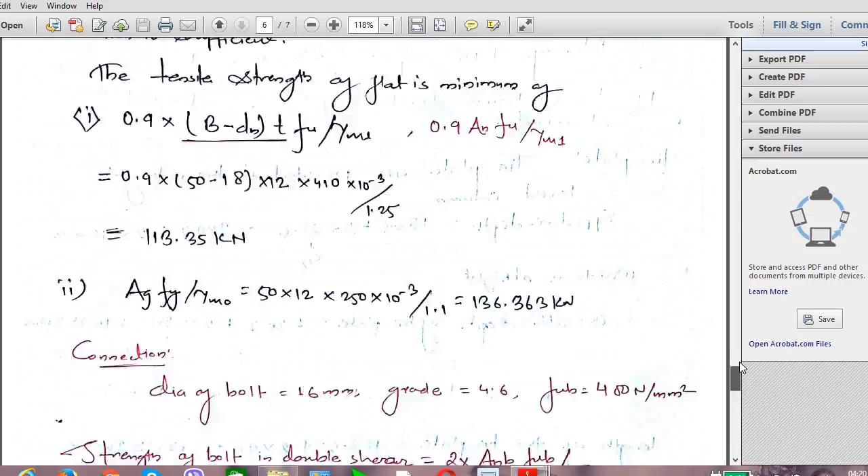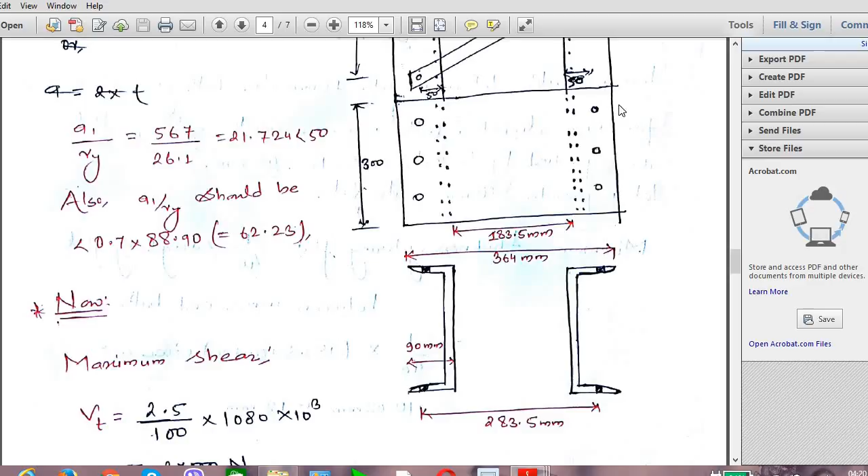And for horizontal it is very easy, you know this value, like spacing 183 and the width of the flange is 90, right? Width of the flange is 90. So total this distance you can calculate easily, 183 plus 90 and this 90. So total distance you will get 90. So 363.5, 364. So for thickness of the tie plate, you can do 1 by 50 total distance.

183.50 plus 2 times 50, that is G, as I already told you. So you will get around 6 mm. So I have provided here a tie plate of 364 times 300 times 6 mm. It is very much easy, you don't have to worry. Effective depth is S plus 2 times CYY. Overall depth of the plate is whatever distance you got plus 2 times minimum edge distance, and you know how to calculate the minimum edge distance. Length of the tie plate, you know, is spacing plus total flanges, and thickness of tie plate is 1 by 50 S plus 2 times G, that is 50, right? So you can get 6 mm. So total we got value 364, 300.